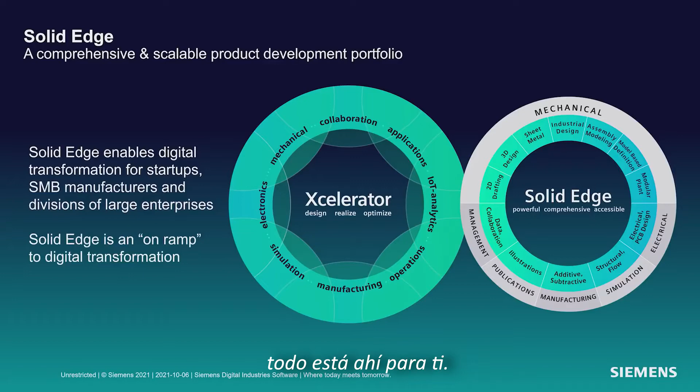What we see is customers doing amazing things with Solid Edge and the Solid Edge portfolio. For example, Enovates, a company in Belgium that makes mobile charging stations. They're able to take Solid Edge and PADS Pro and use those two together to do great things. They don't find that level of integration in other engineering software.

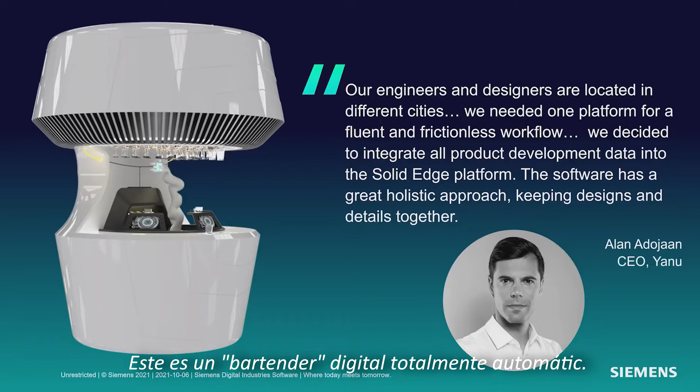Another great example is Yanu. They make the beautiful product you see on the left here. What product might that be? Probably something you've never seen before. This is a fully automatic digital bartender. It can recognize you, make the proper drink, do the proper billing, all contactless, very important today.

And I love what Alan has to say: the software has a great holistic design approach, and that's what we like to see and how we can bring you more productive software.

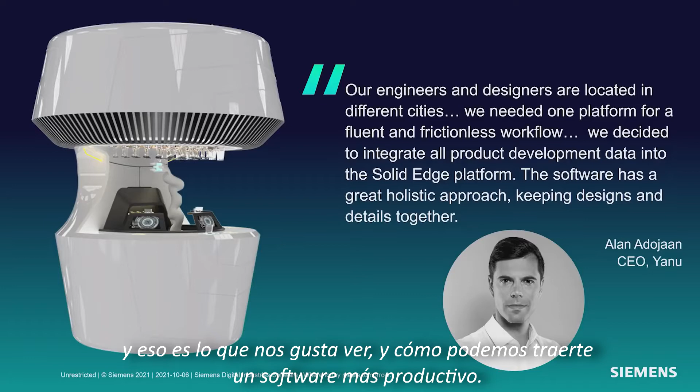So let's talk about Solid Edge 2022 itself. Solid Edge 2022: engineered to grow your business. There's so much in it, we'll only be able to cover some of it today.

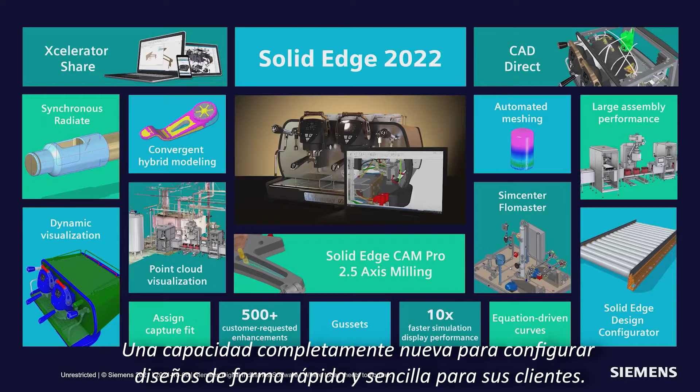Things like Xcelerator Share, allowing you to collaborate with customers and suppliers. Or CAD Direct, integrating CAD files directly into your system from other systems and bringing them directly into Solid Edge seamlessly. Point Cloud Visualization, big scans of plants, being able to design your equipment in context of that big scan. Solid Edge Design Configurator, a whole new capability to configure your designs quickly and easily for your customers.

Now, as we go through our discussion today, we're going to be using two different data sets because there's just so much to see, such a broad range of functionality with Solid Edge. We'll be working with an espresso maker from Fiamma, a company based in Portugal. And we'll also work with a product from Bergner, a company based in Switzerland that makes chemical and pharmaceutical custom machinery.

So let's start by talking about mechanical design, and let's start with CAD Direct. CAD Direct lets you seamlessly integrate data from other systems into Solid Edge without translation and automatically take updates. We'll also talk about convergent modeling. We've been working on this technology for several years now. It's getting very sophisticated: the ability to integrate mesh models with BREP or solid models in one seamless way.

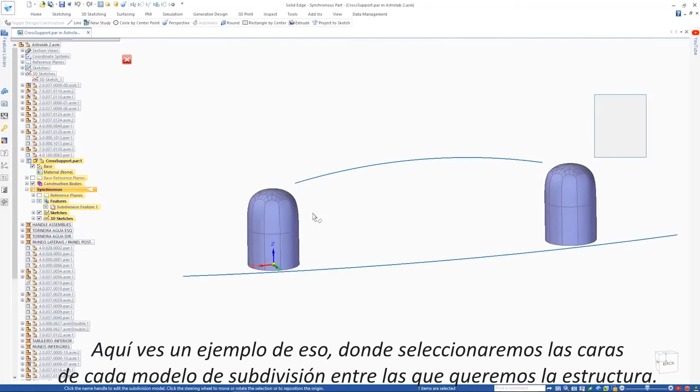So let's look at that with Jeff now. Thanks, Dan. First, we'll take a look at subdivision modeling. In this example, we will add support members to the base of the Fiamma espresso machine. The new subdivision bridge command can be used to easily connect edges or faces of subdivision cages and create a lofted structure between them. Here you see an example of that, where we'll select the faces of each subdivision model that we want to loft between.

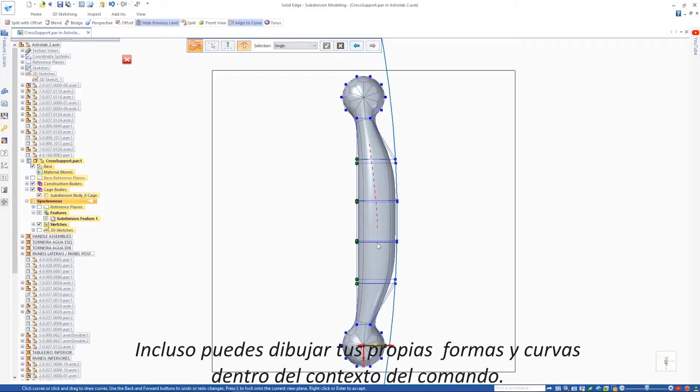Then we'll add the control curve to help us further define the overall shape. Next, we'll be using the new align to curve command to further define the shape of the part. Simply by selecting the cage vertices to define the direction and then pick the curve, automatically map those vertices to the curve. You can even sketch your own shapes and curves inside the context of the command. Even gesturing is supported for inking of your curves.

Here we'll show another option called split with offset to add some pockets to support the rubber feet of the support. A simple selection of the edges with an offset allows you to pull to create the pockets for those rubber feet. Next, we're going to replace the handle with a new design that's been 3D scanned.

This result is a mesh model that we import. We can visualize the mesh with the new faceted edge command. In this case, we'll clean up this model a little with the remesh command. Now, faces have automatically been identified and the sketches are added to the planar faces of the mesh.

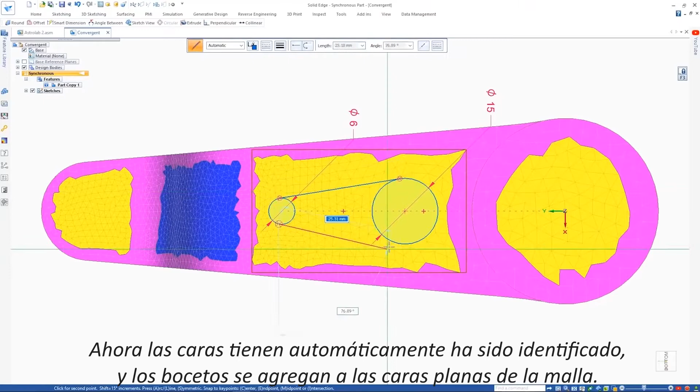We add a series of cutouts in order to reduce the weight and improve the appearance of the part. Notice the resulting geometry isn't faceted. Solid Edge now seamlessly combines mesh and B-rep geometry in the same body or part. We'll add additional cutouts to reduce the material. Once the cutout is complete, it can be patterned.

Finally, we're back in the assembly where we'll replace the current handle with the new meshed handle. But you'll notice the mounting holes are missing from the component. This can easily be solved by doing a Boolean operation using the mesh model as the target and the components from the assembly as the cutting geometry. These new capabilities further enhance your ability to use mesh models in your design process.

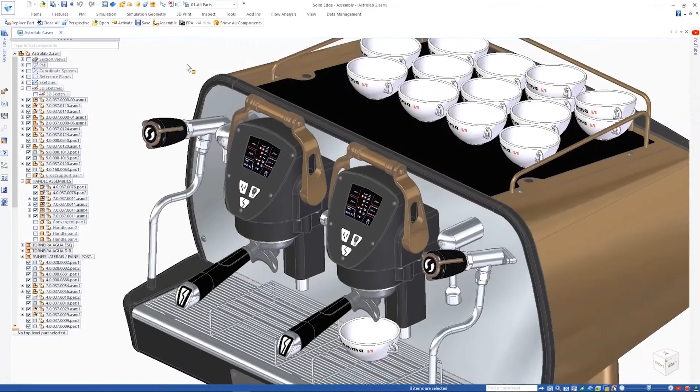Now we'll use the new component finder in the Solid Edge Pathfinder and we'll search for the desired filter holder handle, which is designed as a family of assemblies. One of the versions is designed for a double espresso shot, the other is a single espresso shot. Opening the drawing of this assembly, we'll use the new family of assemblies parts list to place a table and detail the parts used for each member.

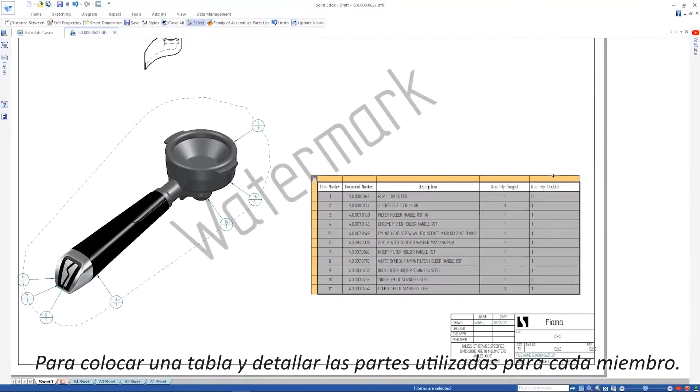Now we'll look at some enhancements to dimensioning in Draft. Dimensioning to virtual intersections or arcs of rounded edges is now supported. We can also choose to display projection lines to those intersection points. Watermarks are also used to convey important information on the drawing. We'll change the existing one so that it retrieves the document status for the drawing property text.

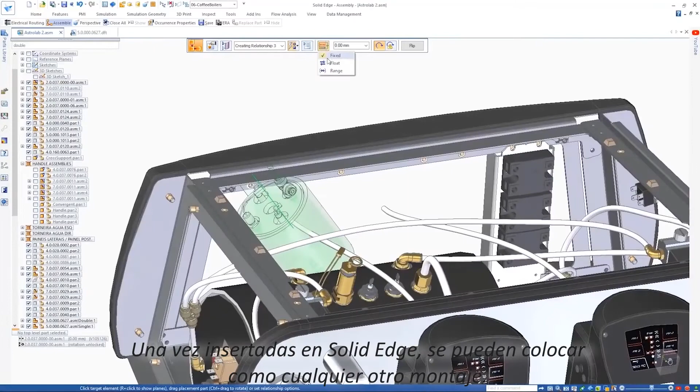The new CAD Direct command enables us to use foreign CAD data, geometry, and assemblies in Solid Edge directly without requiring any translation. The water boilers that you're looking at here were designed in NX. Once inserted into Solid Edge, they can be positioned just like any other assembly. Since we need two of these, we'll simply copy one to create the second.

Notice the boilers aren't quite in the right location. We'll go back into NX and make the changes needed to the mounting bracket such that they'll be in the right position. Since Solid Edge has associative links with NX, a simple update brings the changes in.

Next, we'll look at electrical routing enhancements. Solid Edge now supports the display of bicolored wires, allowing us to change the display of this ground wire to be striped green and yellow. Various pattern types are supported as well, including single stripes, helical stripes, zebra stripes, and dashes.

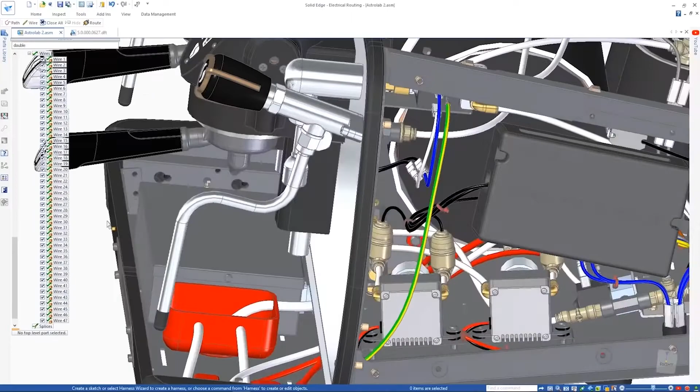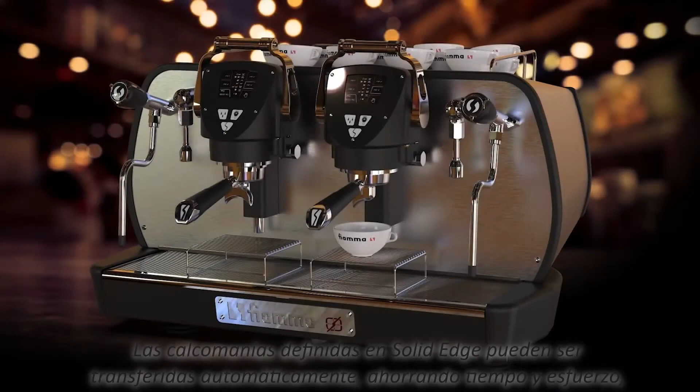And finally, KeyShot, the best-in-class rendering solution, also sees some impressive updates. Decals defined in Solid Edge may be automatically transferred, saving time and effort, which can be seen here on the logos and the cups in the digital scene.

Back to you, Dan. Thanks, Jeff.

Lots of amazing stuff in there, but I'm only going to highlight to you a couple things here that I think are real game changers. CAD Direct. So you have the capability you've seen to get an NX assembly into Solid Edge directly, no translation. And when you make edits to that NX assembly, it comes into Solid Edge automatically. There's no extra files to manage. You don't have to worry about that. It's all CAD Direct. And what about convergent hybrid modeling? You saw taking triangle meshes and B-rep solid model, pulling that all together into a single cohesive model, significantly reducing your design time.

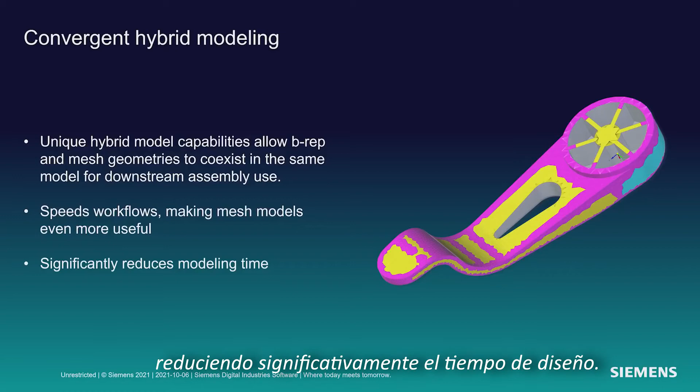Let's talk about some other mechanical design enhancements, some other great things in here. Point clouds. It's becoming fairly common to be able to scan an entire plant or factory and bring that data forward. We can now bring that data into Solid Edge so that you can design in the context of that factory or plant.

What about large assembly modeling? We see people first building parts, then assemblies, then whole factory lines. Assembly modeling in Solid Edge keeps getting faster and faster and faster, best in the business. And synchronous radiate, an amazing new command within the synchronous modeling environment that allows you to deal with radially symmetric parts and edit those effortlessly. So let's take a look at that now, Jeff.

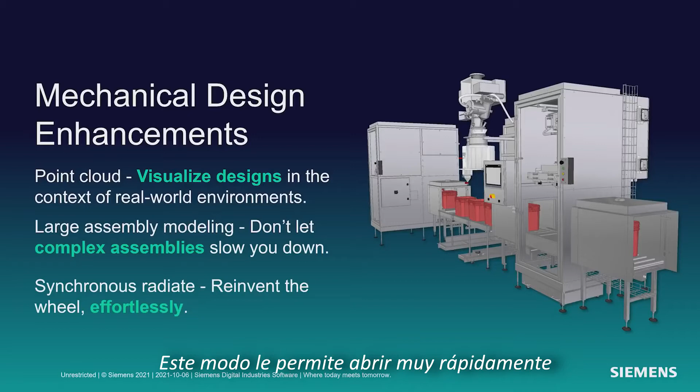Thanks, Dan. Well, the first thing we'll do is we'll take a look at a new assembly preview mode. This mode allows you to very quickly open Solid Edge components and very large Solid Edge assemblies lightning fast. In preview mode, you can manipulate the view, show and hide components, and apply display configurations. In this case, we'll isolate the most critical part of the model that we want to edit using a configuration. Then we'll simply tell the system how we want to open, and open only the components that are to be edited, saving you time and memory.

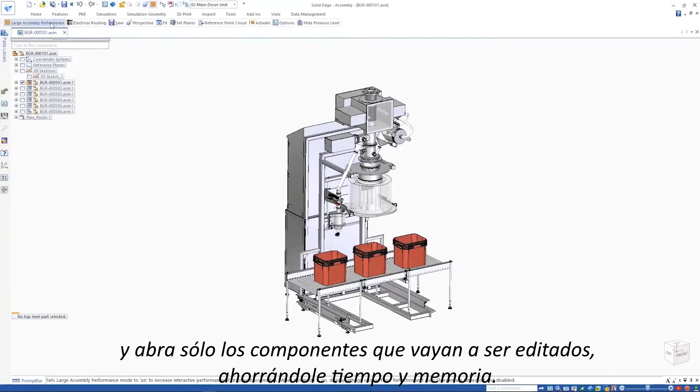Another time-saving enhancement is the gusset command. We now allow you to automatically add gussets to a frame structure. Here you can see the user interface. You can define these gussets in any shape and size that you desire. Then you simply select the frame element, position where the gusset is to go, and the system automatically creates the component there.

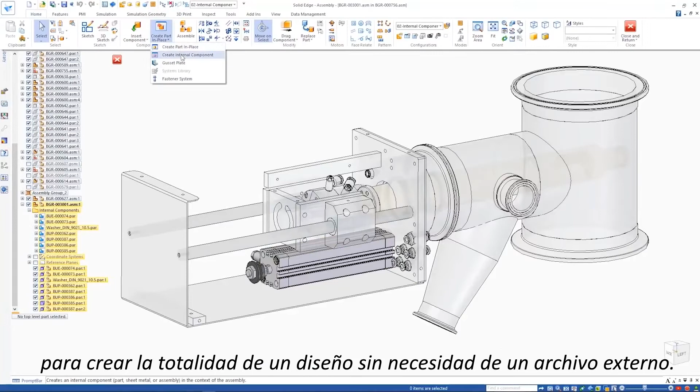If we continue down the internal components theme that we introduced in the last release, we now allow you to create an internal component and actually create the model geometry directly inside the Solid Edge assembly. We've introduced this new assembly modeling capability that gives you the ability to create the entirety of a design without any need for an external file. Here we have a pneumatic cylinder which will be imported as an internal component. We need to add a bracket to this assembly, but since it's a purchased part, we'll just create this as an internal component. And again, saving the need for external tracking of files.

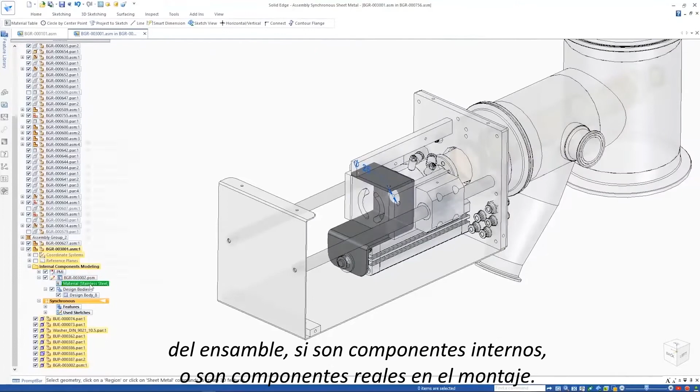If you'll notice during sketching, a pop-up menu allows you to quickly access commands that are relevant to your selection. And this is new for Solid Edge 2022. So we've defined our sheet metal part. We'll also have to give it a material definition and a gauge definition. In addition, we're able to create geometry and reference the components from the assembly, whether they're internal components or real components in the assembly. So again, we're defining the material gauge for the sheet metal component, and we've defined this component completely inside the context of this assembly. You're also able to drag the component, doing animations using both internal components as well as the real component combined.

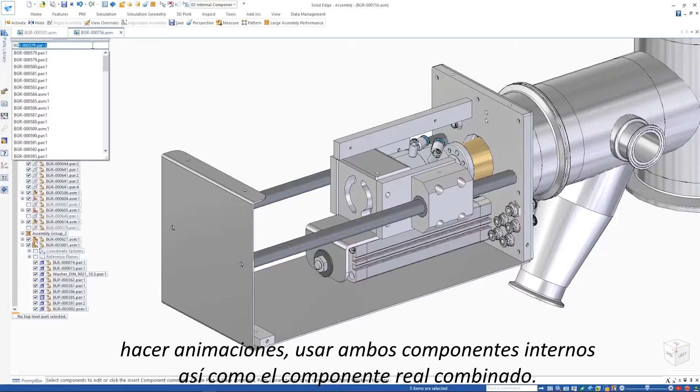The new component finder speeds up the process for locating parts within the assembly. You simply key in the name and it finds the list quickly. Here we found a shaft, and we use the new radiate command to edit the radius or the diameter of the shaft component. You simply select the shaft, putting the component in the select set that you wish to change, and then Synchronous does the rest. In this particular example, we want to include the pocket in the radiate and the offset option. Simply selecting that pocket and including it allows that to be done.

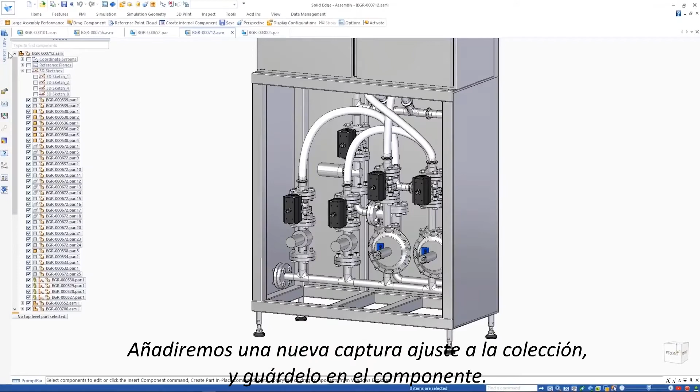A new assign capture fit command allows relationships to be predefined on a component while in the context of the part. Here you can see that capture fit relationships already exist. We'll add a new capture fit to the collection and save it to the component. When I place the handle into the assembly, all you have to do is select the component and select the mating components that you want to mate it to, and the handle automatically snaps into place. It's as easy as that. Here's another example where we have a handle that needs to snap to 5 new locations. Again, the assign capture fit makes it easy.

Solid Edge now has the ability to place point clouds within the context of your design. This allows you to reference and visually indicate where your components will be placed inside a large assembly. Solid Edge supports multiple point types and then allows you to position your component inside the context of the plant design.

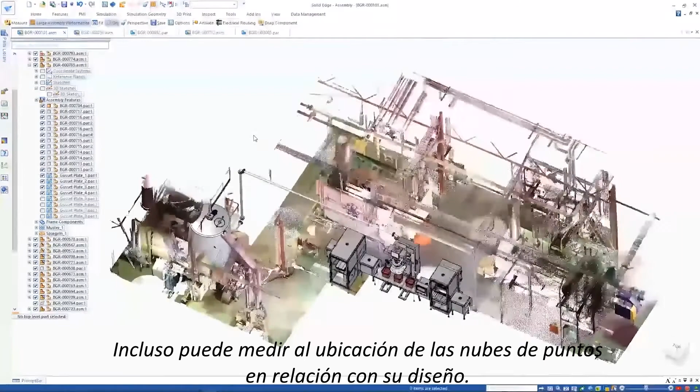The point cloud can be easily repositioned. Clipping planes can be used. You can even measure to the location of the point clouds relative to your design. Here you see that the tank component was in the wrong position and it was moved to match the point cloud and the plant definition more precisely.

And that's it, Dan. Back over to you. All right, thanks, Jeff.

So many great things to see in there. But again, something I really want to highlight to you is a game changer. Point cloud visualization. The ability to take scans in, gigantic scans, millions or billions of points, and be able to look at those in the context of Solid Edge and be able to integrate your design directly in there and design in context of that point cloud. As you can see, they're full color, they give the full feel of the plant or factory. Really amazing stuff.

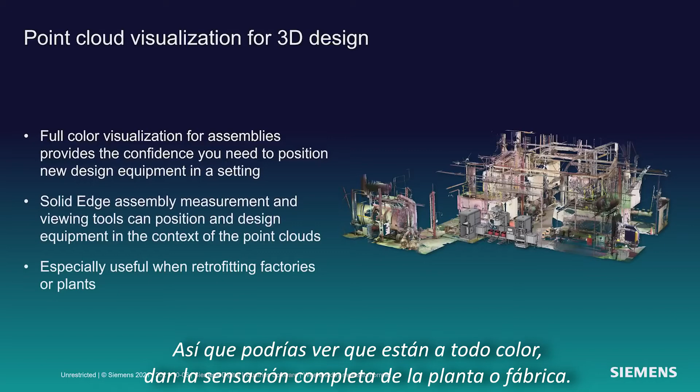And we see that our customers really love this new technology. So Benjamin at Bergner, for example, eliminated a lot of tedious manual effort. It's just so much easier with the new point cloud technology.

And what about large assembly modeling itself? Order of magnitude increase in large assembly modeling performance. So you have that preview mode where you can very quickly bring up the assembly, very, very massive assemblies, decide what you want to work on, and then just bring in that bit of the assembly. Really improve your productivity.

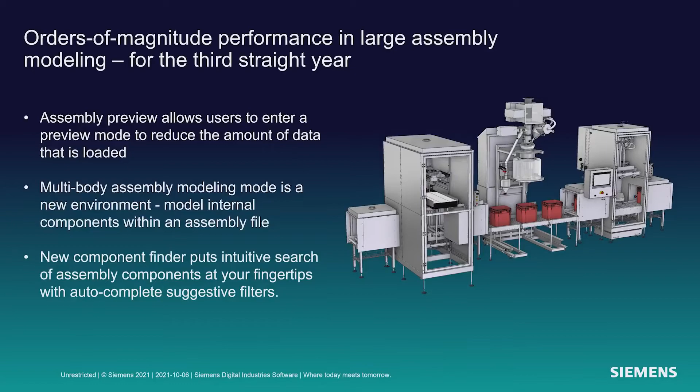And we see that folks are already taking advantage of this. Our beta customers have been using this, like Luca Carminati at CMS. Much, much faster work, save a lot of work on their designs.

Okay, next up is Solid Edge Design Configurator. I'm very excited about this. If you're doing any engineer, configure to order type of products, the ability to very quickly change your designs and have new quotes very quickly. Let's take a look at it with Jeff.

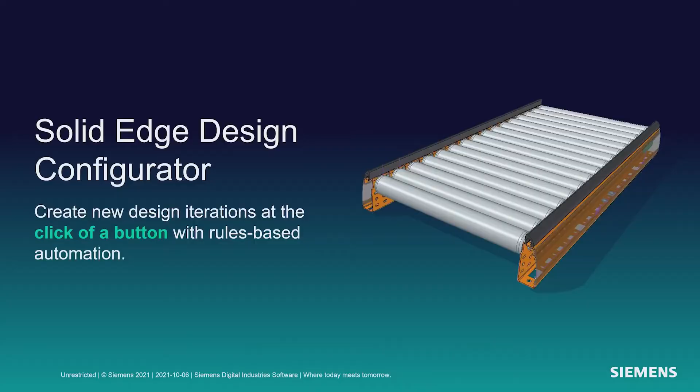Thanks, Dan. The new Solid Edge Design Configurator allows you to design multiple product variants directly in the context of Solid Edge. In this example, we'll configure a variety of conveyor designs. The first step is to select the component to be configured. The next step is to define the master input parameters of the configuration. In this case, it's the length and width of the conveyor plus the pitch of the rollers.

Values can be easily added for any parameter, and images can be included in order to help the end user identify the needed inputs when configuring the model. Defining a new input parameter for the pitch of the conveyor, we will quickly configure the name, type, label, and render style to use radio buttons. The pitch value of the conveyor can be customized between 60 and 90.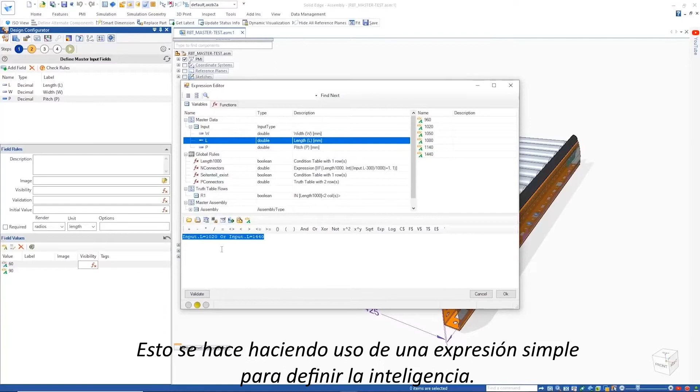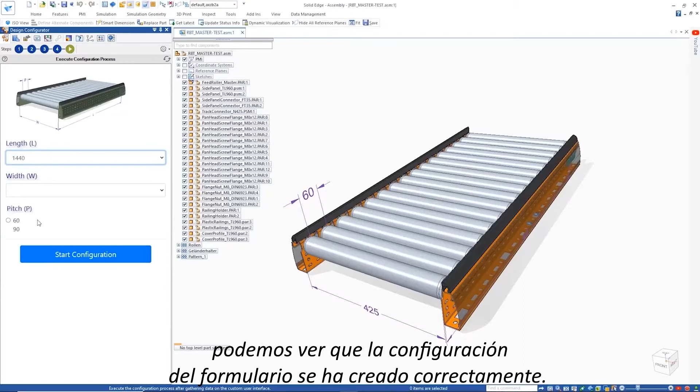However, since different lengths of the conveyor require different pitches, visibility rules need to be applied. This is done by making use of a simple expression to define the intelligence. Here, the rules are being validated to ensure consistency and proper definition have been made. Here, the function is going to be copied and pasted to allow you to easily reuse formulas without having to include them again. Skipping to the last step of the configuration, we can see the configuration form is properly created.

Next, defining the rules for the process. Here we have multiple rules to drive and configure the connectors at the bottom of the conveyor. We will use a combination of simple condition and expression rules and a truth table to work out the number of positions of the connector. All rules can be quickly validated.

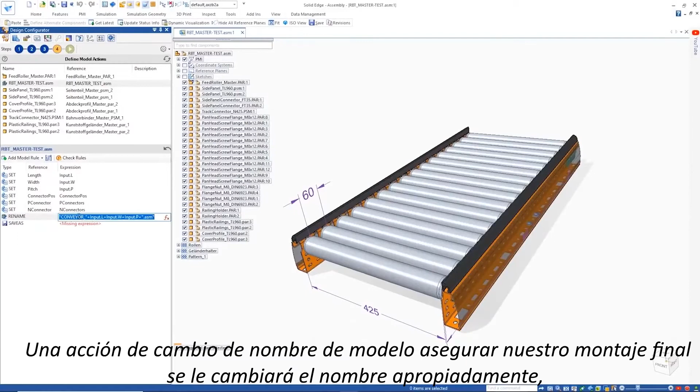Finally, we specify the actions to be taken. Here, variables are set and components are replaced to satisfy the input parameters. A rename model action will ensure our final assembly will be renamed appropriately and also create the other necessary outputs, for example, a STEP file as shown here.

Now we can run it quickly and create as many configurations as needed. A newly generated configuration can easily be shared with Pack and Go. The configuration logic is all stored within the CAD model. There's no need for any further plugins or external resources.

And with that, Dan, I'll hand it back to you. All right, thanks, Jeff.

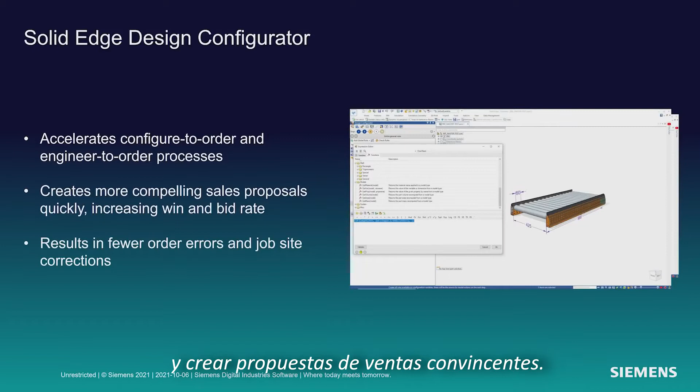So as you see, with the Solid Edge Design Configurator, you can accelerate your configure to order and engineer to order processes and create compelling sales proposals. You're also going to see that it really error checks for you and it creates a nice dialogue for your users to interact with so you can very quickly configure new products.

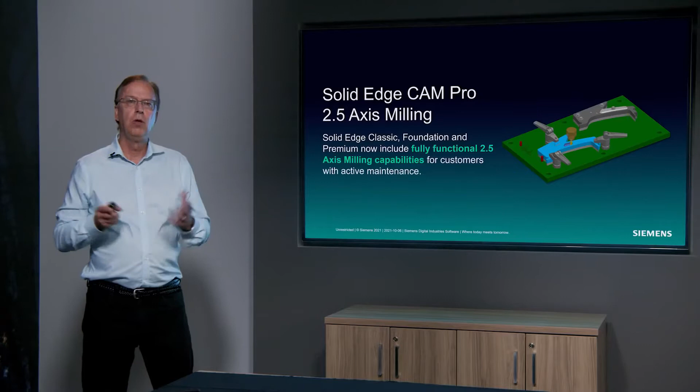What about CAM, Solid Edge CAM Pro? Tried and true technology developed over the last 40 years. A lot of users using it today and enjoy the benefits of it. But what if that technology was available to all of you, all Solid Edge customers on maintenance? That's what we want to introduce to you today with Solid Edge 2022. Jeff. Thanks, Dan.

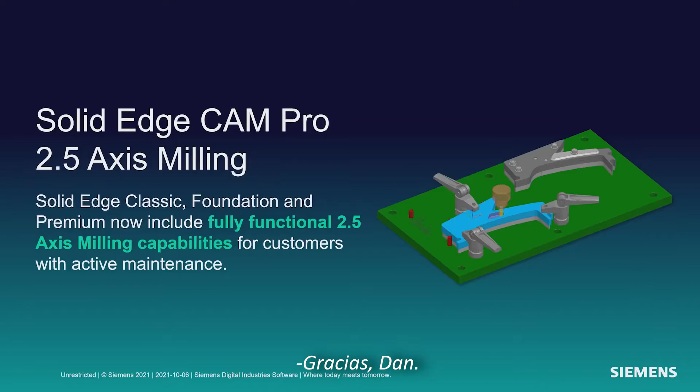Here we'll be using Solid Edge CAM Pro to create the manufacturing toolpath for the rear legs of the Fiamma espresso machine. First, we'll use the Solid Edge assembly tools to create the shape to represent the stock parts, and also the parts that form the fixture assembly, which includes the standoff plate as well as additional fixing holes from the standard database. We will also make use of supplier catalog in 3DFindIT to get the appropriate socket head cap screws to be used to fix the component in the fixture.

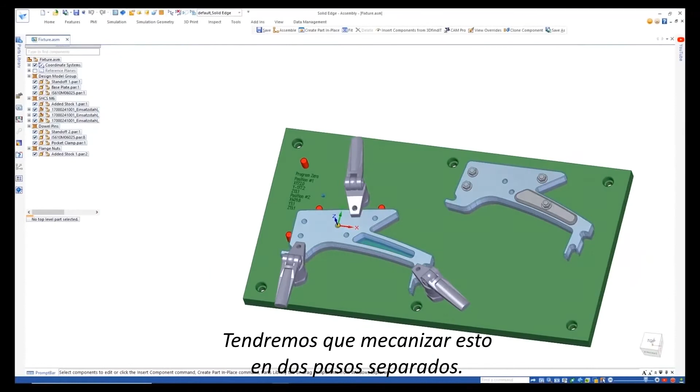So as you can see, Solid Edge is a great CAD for CAM tool. We'll need to machine this in two separate steps. Step 1 is to mill the pocket and drill the holes, and step 2 is to machine the profile. One click will send the entire assembly to the Solid Edge CAM Pro application. Note that associativity is maintained at the complete assembly, so if there are any last-minute changes, we can quickly update them and continue the NC programming process.

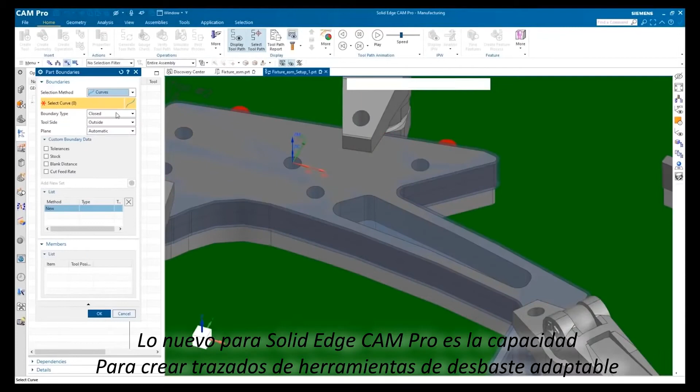New for Solid Edge CAM Pro is the ability to create adaptive roughing toolpaths for 2.5-axis operations. This is included at no additional cost. These are faster than traditional toolpaths and extend the cutting life of your tools. Notice the advanced graphic capabilities for validating your toolpath.

Here we'll create spot drilling operations for the 5 holes in the support. Notice the graphical pop-up hints that help us with operation selection. Graphical helps are also available for geometric selection. Each time we select a hole, we get a preview of the machining that will take place. Again, at any point in the process, we can get visual feedback on our decisions.

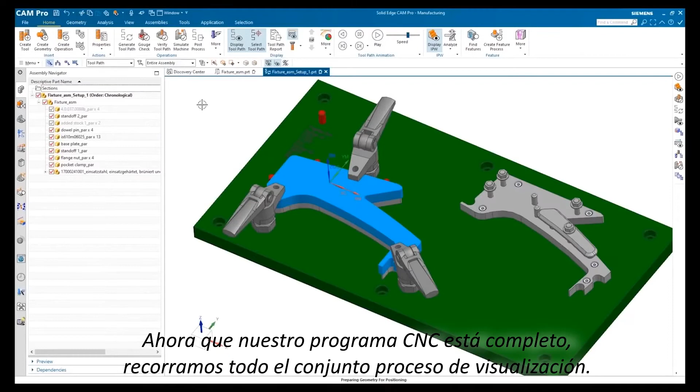Now that our CNC program is complete, let's run through the whole visualization process. Notice you get to completely visualize the entire machining process before committing it to machining. Of course, no job is finished until it has been post-processed for a specific machine. That's where PostHub comes in. It's an online database of over 1,200 post-processors. You can easily filter and find exactly the one you need. Also, PostHub is constantly updated, bringing you the most recent tools.

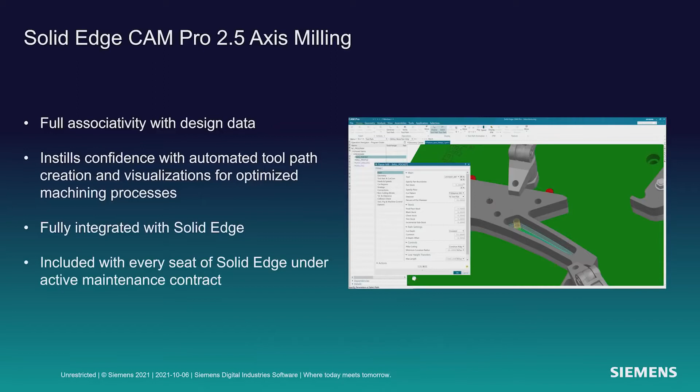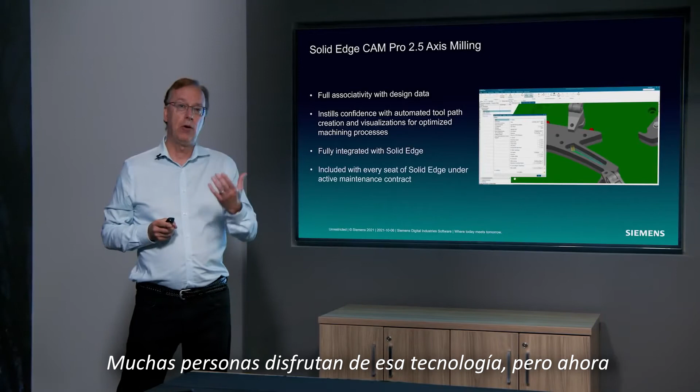And Dan, with that, I'll turn it back over to you. All right, thanks, Jeff. I'm really excited about this. There's a great heritage in Solid Edge CAM Pro and our machining technology over the last 40 years. Many people enjoying that technology, but now every Solid Edge user who's on maintenance can enjoy that technology and work with Solid Edge CAM Pro.

Next up is Xcelerator Share. I'm super excited about this. It's a functionality in Solid Edge that allows you to collaborate with colleagues, suppliers, customers very easily. Nothing for you to set up, works on all sorts of devices. So let's take a look at that.

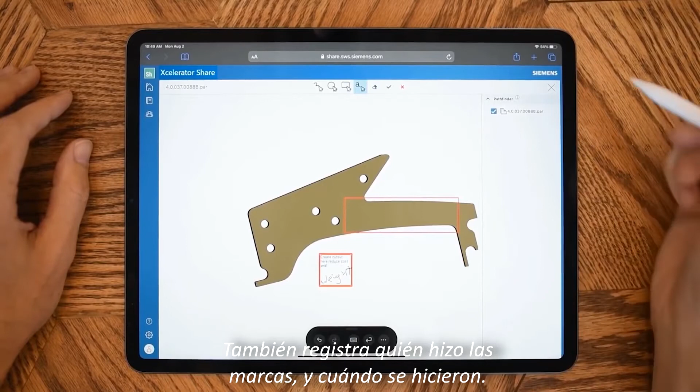Xcelerator Share offers maximum traceability, as all markups are recorded, enabling conversations back and forth on any of the issues you're tracking. It also records who made the markups and when it was made. We can also easily go back to the markups at any time. Simply save your markups and send them to the designer for review.

With Share, you can also directly connect to Solid Edge, synchronizing your data from your desktop to the cloud. Here we have the same project on our desktop. It's represented simply as a folder. Any data that we have in this folder will get synchronized in the background.

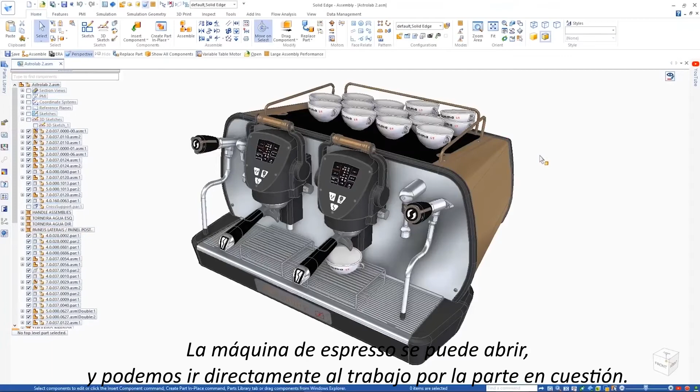In Solid Edge, we can securely sign in to Xcelerator Share and see those same cloud-based projects. The espresso machine can be opened and we can go right to work on the part in question. The designer can easily access that same markup in the cloud directly from within Solid Edge.

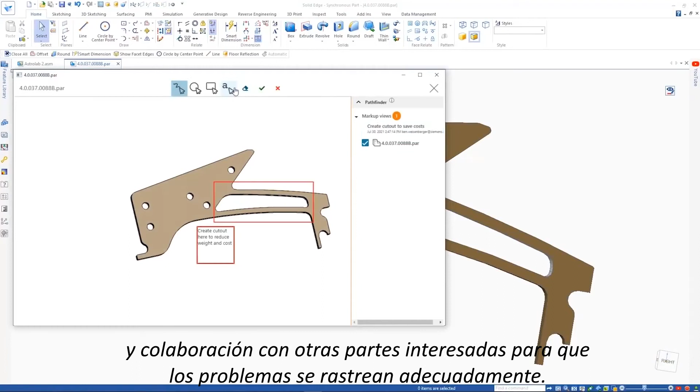Once completing the change, another markup continues that two-way conversation and collaboration with other stakeholders so that the issues are tracked appropriately. Another great feature of Xcelerator Share is the ability to share a project with anyone. Simply enter the email address of the person with whom you'd like to share and choose their access permission level. Here we can choose View, or View and Download, or Edit and Download, depending on how you want to protect your intellectual property. We'll share this design with one of your colleagues and our customers and give them the appropriate access.

Finally, with the Share Augmented Reality feature, you can see exactly how your designs will look in the real-world environment. Snap the design onto any surface seen in the camera lens at the correct scale. The finger gestures can be used to manipulate the model and easily visualize what your design looks like in a real environment. So back over to you, Dan.

Thanks, Jeff. All right, Xcelerator Share. Really great stuff. Next generation cloud-based collaboration that allows you to work inside your company with colleagues or work with suppliers, work with customers. Nothing for you to set up. Works on every device. So whether you have a Mac or an iPad or a Chromebook, it works on all those devices with no special setup. And you saw the ability to write notes that are automatically converted to text, share those markups. Very exciting stuff.

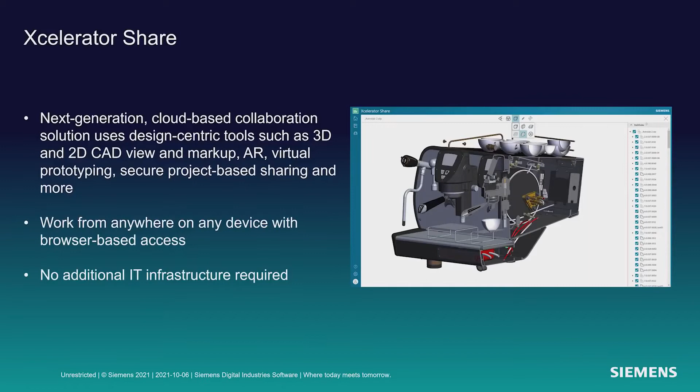Next up's dynamic visualization. You make complicated products, large assemblies. How do you know which parts are from which supplier? Or which parts are of what material? Dynamic visualization will help you with that problem. Let's take a look at that now with Jeff.

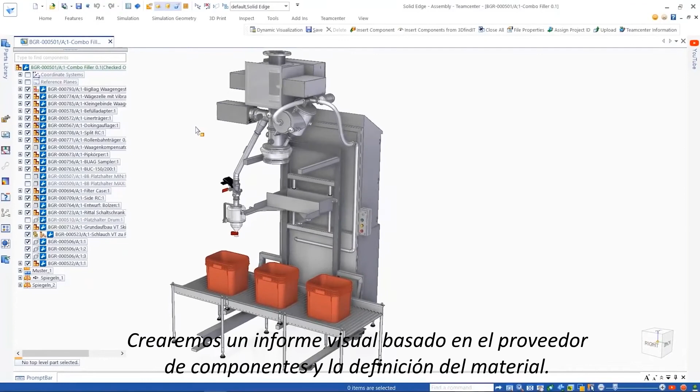Thanks, Dan. Dynamic visualization gives you the great capabilities to generate visual reports of your assembly. So what we'll do here is we'll open a Solid Edge assembly using Teamcenter Active Workspace. We'll create a visual report based on the component supplier and the material definition. So the first thing you'll do is you'll add columns to the user interface, those columns that you want to filter on. Here we've added suppliers and material. So for each of those, we'll filter on the particular material and the particular supplier that we're interested in visualizing.

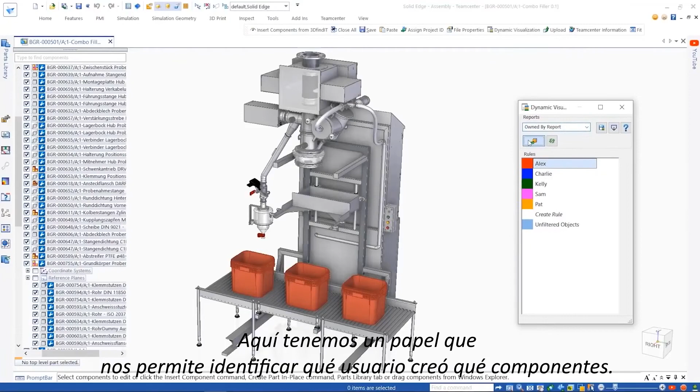So once the rule is created, you simply apply the rule and the model changes display to show you the rule definition. And here you can see in red the components based on that supplier and that material selected. You can also export these rules and import them into various assemblies. Here we have a rule that allows us to identify which user created which components. We'll modify that rule to allow us to identify work in progress as well as components that are created by Pat. We can highlight those, select those, and then go into edit mode.

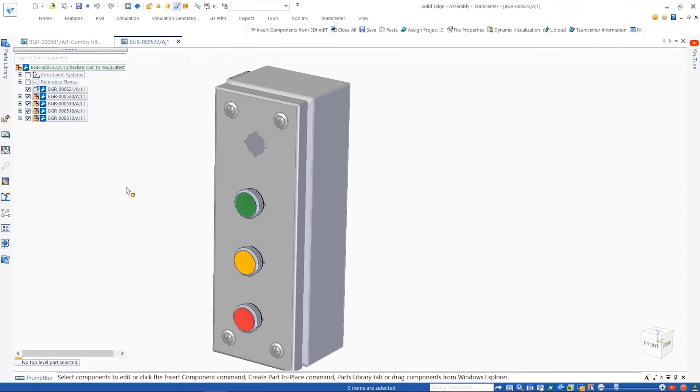Here we'll see we need to add a warning light to this box. We use 3D Find It to find the particular light from the particular supplier that we want. Once we've identified the right one, we'll generate the component in Solid Edge. But in this case, the component already is contained in the Teamcenter database. So instead of replicating that in the database, we'll simply reuse what's already there. Also in Solid Edge 2022, we were able to take advantage of the project definitions within Teamcenter. Here we can see we've assigned the components to a particular project in Teamcenter.

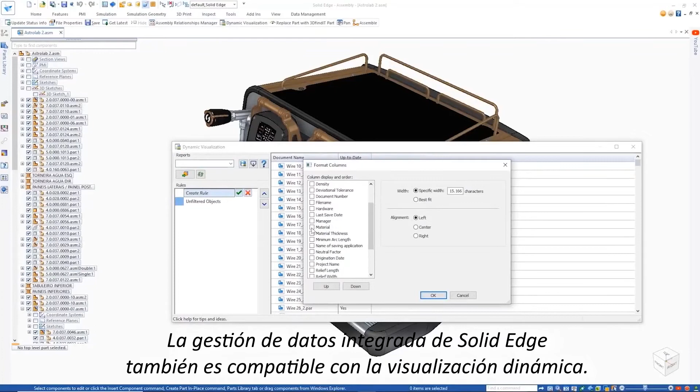The Solid Edge built-in data management also supports dynamic visualization. Here again, we'll display the assembly coloring based on the material type to ensure that we have the proper materials throughout the model. So again, the rule is applied, visually it's displayed, and you'll notice that the red handles should be green. Those should be stainless steel and not aluminum. So we'll send those back to the designer to be reworked and the proper material to be applied.

So once applied, we can then do an auto update of the status, and the system will automatically show us the status and then update to get the latest component. In this case, the handles are updated with the proper material. We will rerun the same rule, and you'll see that now the handles are green and therefore in the correct material.

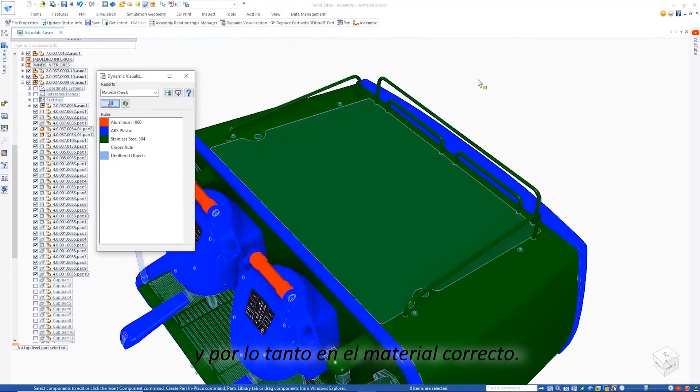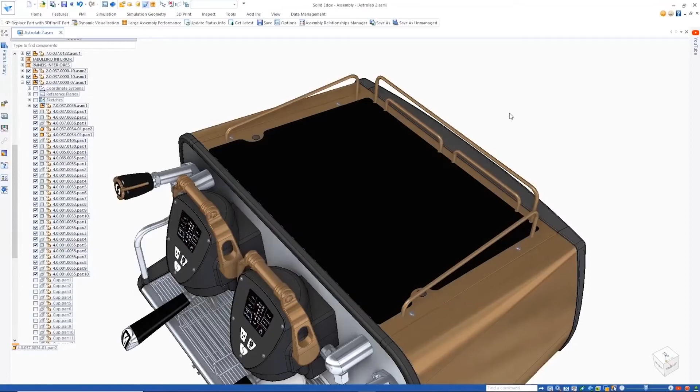This next example will use replace part with 3D Find It. 3D Find It has the ability to take a component and use that component geometry to search the catalog database for similar components. Here, once the component is found, we identify the supplier that we desire, and with a few simple clicks, that component is inserted into the assembly, replacing the previous geometry.

And lastly, we've added Pack and Go directly to the Windows Explorer UI, making it easy for you to share your data without having to open the assembly within Solid Edge.

And that's it, Dan. Back to you. All right, thanks so much, Jeff.

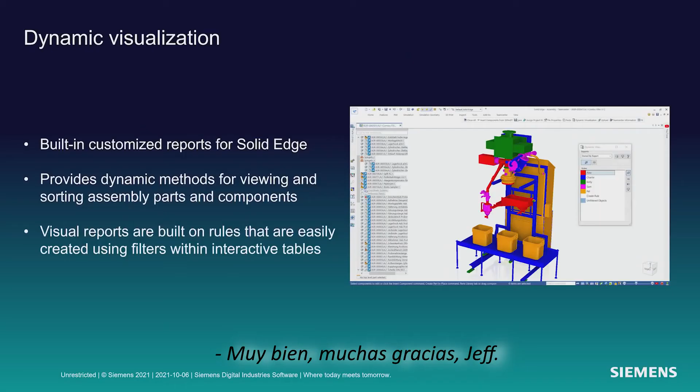So many good things you saw in there with 3D Find It and the ability to replace components, search directly using geometric shapes, and so on. But I want to highlight to you this dynamic visualization. Being able to say, well, what supplier do I have for the different components? Color code for me all the things that are stainless steel. Color code for me all the parts that are in work. Amazing technology that would save you a lot of time and money.

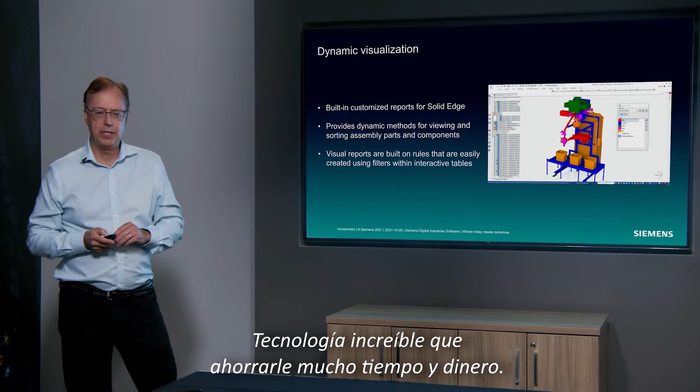Next up is Solid Edge Simulation. We have some great enhancements in there, some game-changing enhancements in terms of the ability to remesh parts using the body mesh command, and some other great tools. Let's take a look at those, Jeff.

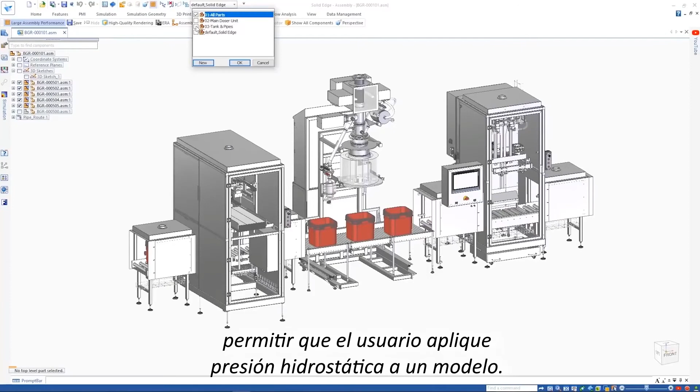Thanks, Dan. We'll start by looking at a new boundary condition allowing the user to apply hydrostatic pressure to a model. So we'll apply a configuration that gives us the geometry of interest. Here we want to look at this tank on the left and do an analysis, assuming that tank is filled with liquid.

So we'll create a hydrostatic study, and in the definition of the loads, we'll use the new hydrostatic pressure command. All you have to do is to identify the surface to apply the load, identify the depth of the liquid in the tank in this case, and then provide the density of the liquid within the tank. Solid Edge will do the rest.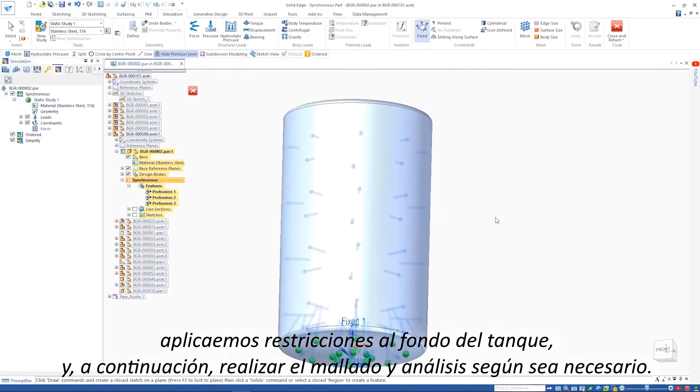To finish the analysis model, we'll apply constraints to the bottom of the tank and then perform the meshing and analysis as needed. Notice on the new mesh dialog a body mesh. This is proprietary technology from Siemens that does a really good job meshing complex models. Some things that couldn't be meshed before can now easily be meshed much quicker and much more reliable than in the past.

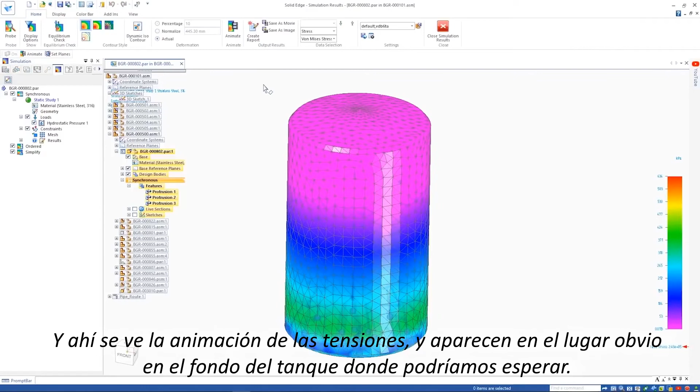So here you see the result of the hydrostatic pressure load in this tank. We'll change the liquid level in the tank and run the analysis again just to validate that this tank will withstand the pressure exerted on it in production. There you see the animation of the stresses, and they show up in the obvious place at the bottom of the tank where you might expect.

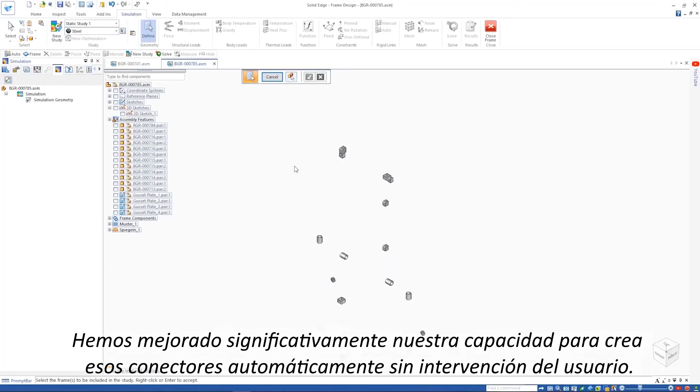Another great enhancement we have in simulation for Solid Edge 2022 is improvements to beam meshing. Here we're taking a frame structure and creating beam elements for the finite element analysis. Notice that the rigid connectors were automatically placed. We've improved significantly our ability to create those connectors automatically without any user intervention. Here the user has selected the bottom and changed some of the parameters to get the rigid connections correct. The bottom of the frame is then fixed, loads are applied, and the analysis is run.

Once complete, you'll see some enhancements to the output, to the post-processing for this model. We now can post-process and display contours using von Mises stress, and we've also improved factor of safety stress contours based on those same von Mises stresses.

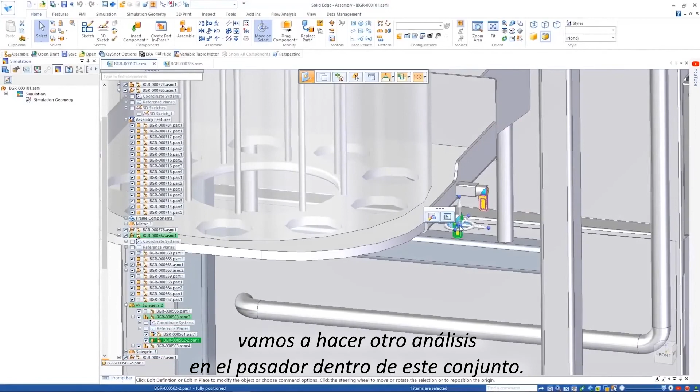Now back to the assembly, we're going to do another analysis on the pin within this assembly. You notice this pin is a mesh model. Simulation can now perform analysis on mesh models. You simply apply the boundary conditions, the loads and constraints where needed, and run the analysis. Here you see the result for the pin on this mesh model.

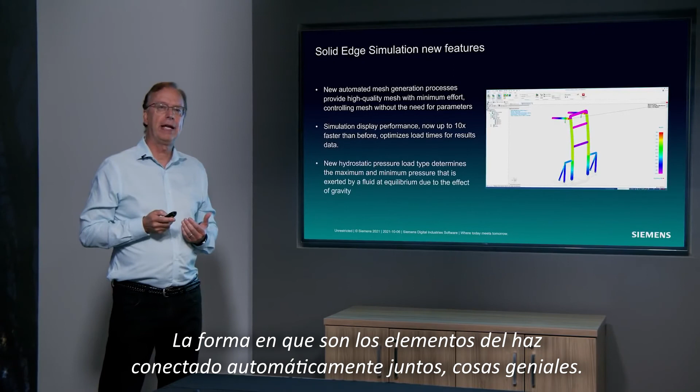And with that, Dan, I'll turn it back over to you. Okay, thanks so much, Jeff. Lots of great new things in there. Obviously, the hydrostatic pressure load takes a lot of work out of the process for you. The way the beam elements are automatically connected together, great stuff. But also that body mesher. You can take a mesh that's very irregular, very difficult, and remesh it with the body mesher. It's a game changer for analysis.

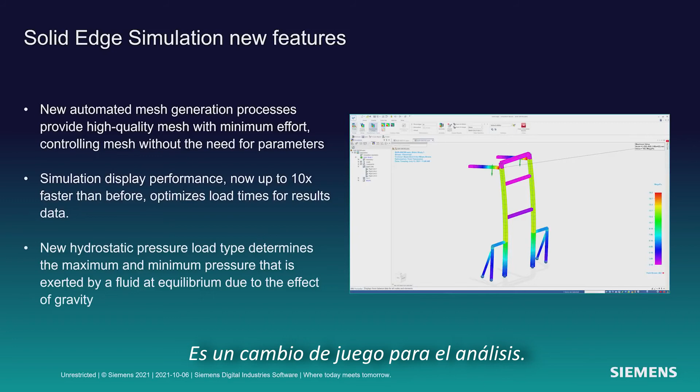Next up is Simcenter Flomaster for Solid Edge. If you're doing any types of products where you have piping and you need to do analysis or design on the piping and the flow within the pipes, Simcenter Flomaster for Solid Edge is for you.

Let's take a look at how it works with Jeff. Thanks, Dan. The unique CAD to Flomaster technology extracts the geometry from a Solid Edge assembly and automatically creates the corresponding fluid volume that exists inside the pipe runs and components. During the process, a face can be selected to give the length scale and convert the system to a subsystem.

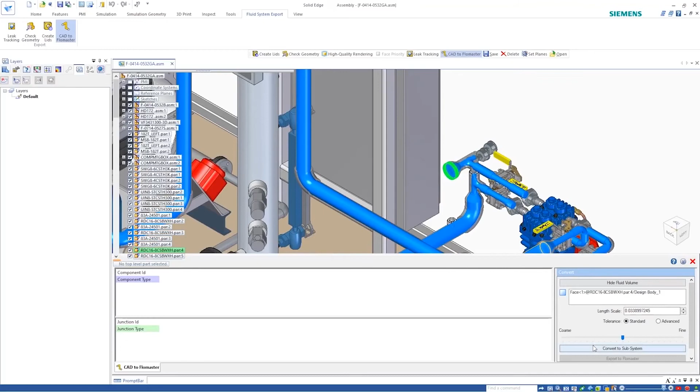The abstraction process is fully automated. There is also full control over the fidelity of the model, which can be adjusted with the slide bar. Individual elements can be inspected, deleted, and merged.

Once the network configuration is defined, the geometry can be exported to Flomaster. Following export, the file will be saved for reuse, then automatically opened in Simcenter Flomaster for Solid Edge in the Subsystem Import Wizard. The CAD geometry, centerline, and component connections can be seen in the wizard, and the model can be rotated to the desired projection when the network is created.

On selecting Import, a new subsystem will be created for review. The entire subsystem can be used to create a model, or individual pipelines can be extracted into their own subsystem.

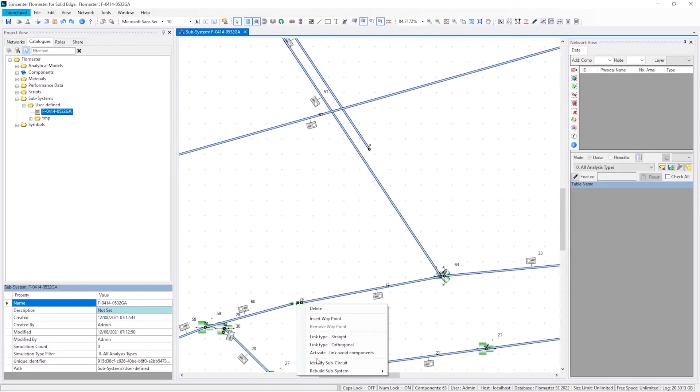For a flow analysis of this model, we are going to extract the pipe from the two compressors to the center vessel. We create a second subsystem from the first and save it in the subsystem catalog.

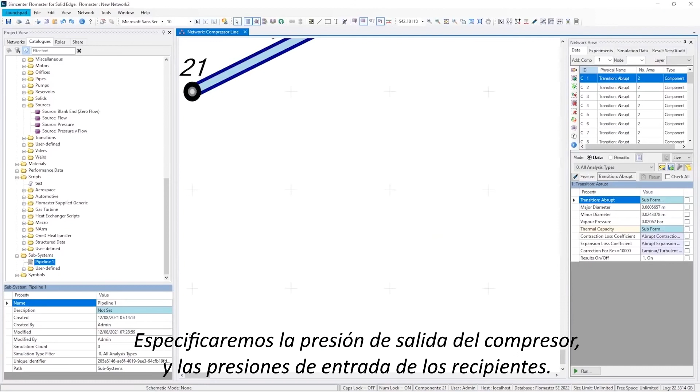We'll now add the subsystem to a new network and specify the boundary conditions using pressure sources. We'll specify the compressor outlet pressure and vessel inlet pressures. For this low-pressure system, we'll specify air as the working fluid and run a static simulation.

Following the simulation, we can look at the results for individual components or look at the whole system using network visualization. With this, we can quickly oversee flows, pressures, and velocities.

Next, we'll look at the effect of a pressure pulse from the compressor on the system. We'll specify curves defining the pressure pulse at the source, and then run the transient simulation.

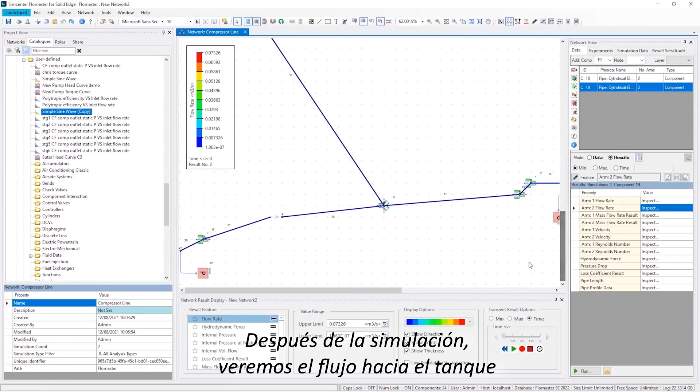Following the simulation, we'll look at the flow into the tank, where we can see the effects of the pressure pulse from the compressor. Then, moving to the compressor outlet, we can enable transient visualization to see the variation in flows, and that the larger flow is from the left-hand compressor. And back to you, Dan.

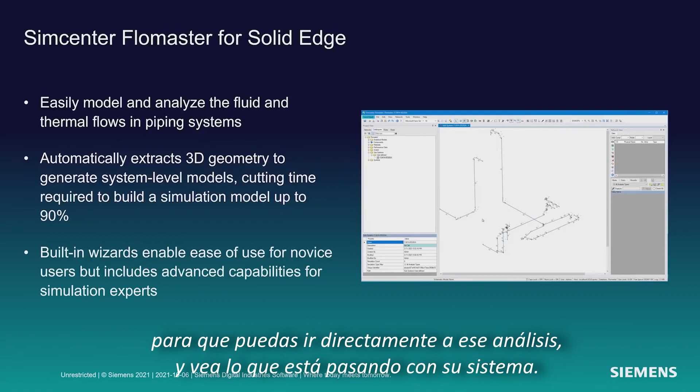Thanks, Jeff. Some super advanced technology there that we're happy to bring to the Solid Edge community. This is one of the advantages of the Xcelerator portfolio, the ability to bring advanced technology to you. Great capabilities here in terms of easily modeling and analyzing the fluid system, with great extraction of the center lines automatically from the 3D geometry, so you can go straight into that analysis and see what's going on with your system.